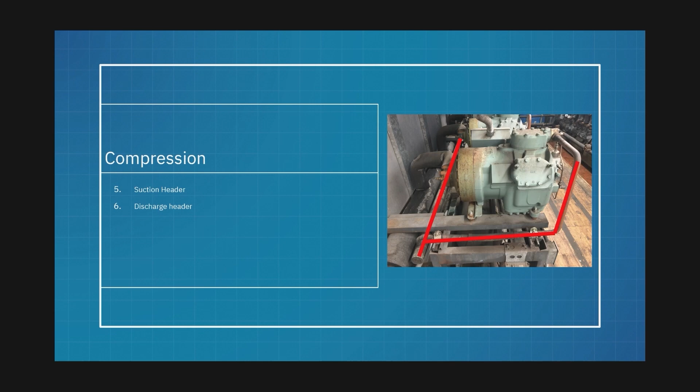So we talked about our oil control on our compressor, and it's getting oil, right? Well, this is the entire oil system. If we look at the discharge, that's the red pipe. The first thing it's going to hit is our oil separator. So we're going to run through the oil system, how that's going to work, how we're going to get that oil into that oil control, and then several things that can go wrong, because that's for techs. If it worked, we don't care. It's when it doesn't work that we want to talk about.

So that's a picture of my oil separator, right? That's one version of our oil separator. That Temprite, yeah, we know that one. That one, if you notice, is kind of sitting out of the way. That's a retrofit, not the original oil separator. Didn't fit in the space where the old one did.

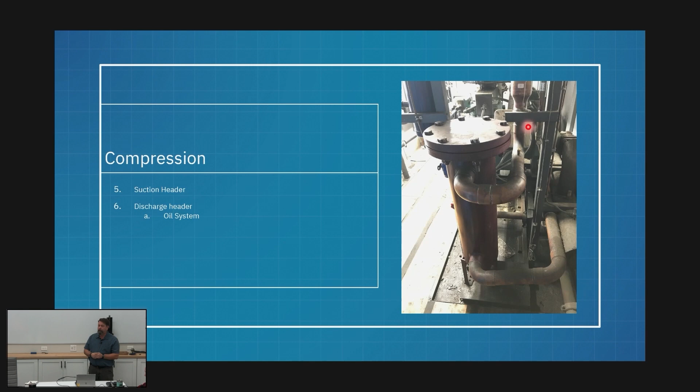This is something Kalos is doing, right? We do these on projects. Here's the oil reservoir, that's where the oil goes. It comes out of my separator, and there's my OCV.

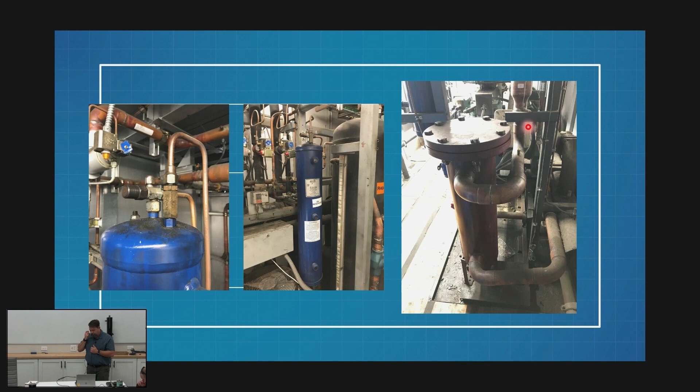So hopefully by now, everyone in here has heard something about this. This isn't the first time we've had some type of oil class. Not going to spend a ton of time on it, but I do want to go through it again to make sure that you guys are clear on it. And if you've got questions about any of these pieces and parts, let us know. So the first thing, let's talk about that oil separator.

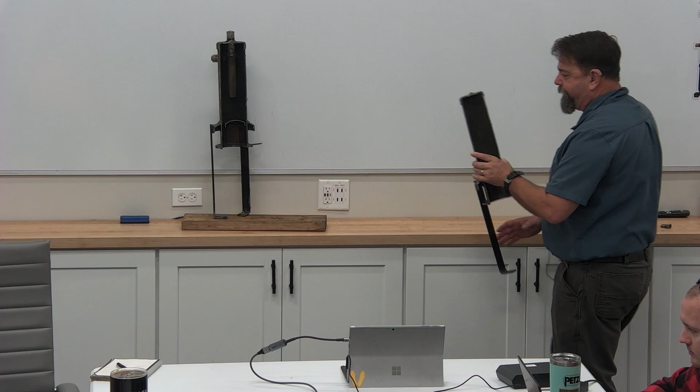Yeah, let's go through that real quick. So we cut this one apart. We've had it in here a few times. I actually took it apart this morning unintentionally. I'm just going to pass that around.

So the oil separator - my hot gas is going to come into this guy, and it's going to take that oil, a huge portion of the oil that's coming out of my compressor, and pull it out of the refrigerant. Now, I said a huge portion - how much? Well, it depends on the type of oil separator, it depends on the system, but not 100% ever.

All right, we're never going to separate 100% of our oil. So we're going to circulate some of our oil through the entire refrigeration cycle, just like a self-contained or a single condenser, single evaporator type system. Your air conditioner has got oil in it, and it's going all the way through. Well, we're going to still do that. We've got to do that because we've got valves in our system - TXVs, solenoids, EPRs. We have all kinds of metal valves, metal on metal.

So we want to be sure that we lubricate that. So we actually have two oil systems - that's the passive oil system I'm talking about, the one where I'm not separating from this separator and I'm sending it out to the store. Now, why does that matter? Well, there's a couple reasons.

For my startup guys, this is piping, right? It's a passive system once it's installed. But if it's not installed properly, it's not going to return my oil properly. So my startup guys have got to be looking at this to make sure the installers put it in correct. There's a lot to that, and this isn't really a class about that, but I am talking about traps - inverted traps at the top. I'm talking about my risers being one size smaller, or whatever the engineering is calling for.

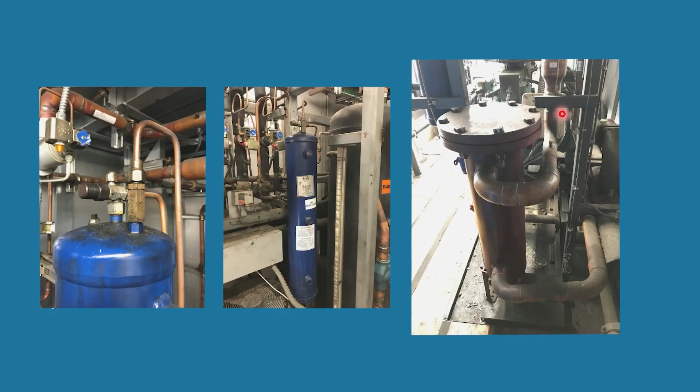All right, how many balls should we be floating in an oil reservoir? Anybody know? One or two. All right, so the idea is one, okay? But let's talk about it in practice, the way this plays out. So that one I got a picture up there has three balls. A lot of them only have two. They're a third smaller, okay, hold a couple gallons, that's it.

All right, how much oil do I need for that separator to work properly? About a teaspoon, right? I just got to cover the hole in the bottom so refrigerant doesn't blow out into my compressors. The bottom coming out of that is going to my oil float, my oil control, mounted on my compressor. So I got to keep that hot gas from pushing out to my oil control. So I got to have a full line of oil. That's literally all, I don't need any more than that.

So what's the story with all these balls? Why do I need one? Why do I need one ball floating? Because I don't know if I have zero teaspoons of oil in there and I am blowing hot gas, or if I've got enough oil in there that I'm not. I have no way to know that between zero and under the first ball. I have no way to know. So the first ball is for me to know I have enough oil. That's why I have one ball. That's why we say we want one ball.

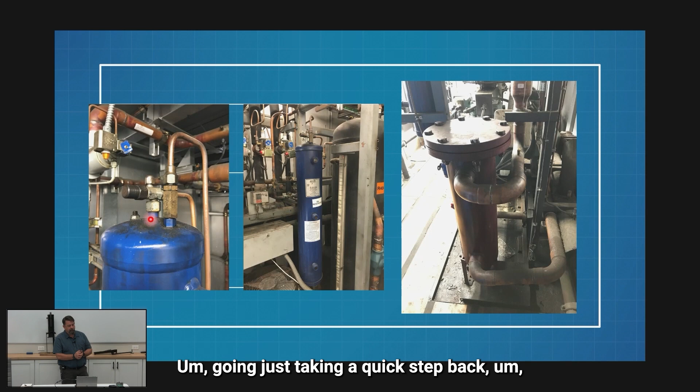You don't have anywhere to push that oil, so you lose your differential. Yeah, okay, all that's gone. Your ball opens and nothing happens, very little, right? Yeah. So now I'm gonna start filling this guy up.

So now I've got two oil separators, or reservoirs. My oil separator, and my ball sits here. That can hold a gallon, huh? Maybe two? Gallon and a half? Yeah, till I get all the way up here? Well, one of the things that's gonna happen is, as I start losing the amount of space in here, because my oil's filling up, this guy's velocity is gonna change.

It's not gonna be as good, right? So I've got less surface area to separate, so he's actually gonna stop separating. That's what we're gonna actually see happen, okay? So I'm gonna start filling up with oil until I get to a magic spot where I just don't have enough surface area for that to happen. I just stop separating.

Right, Michael? Oh, so that's how not letting oil out causes an oil separator to stop separating. Okay, right, now-

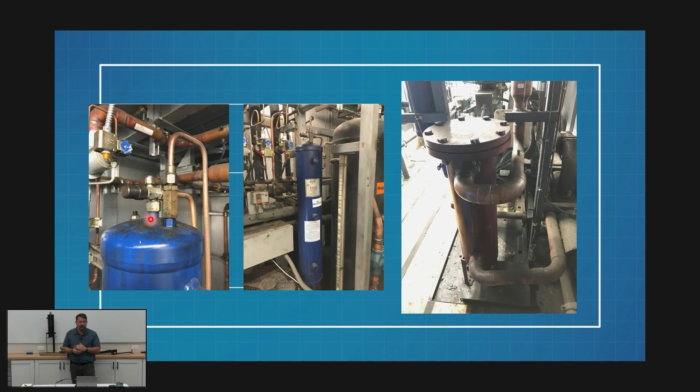That's why am I pulling this out? Yep, I suspect it's stopped up, right? Or something's not feeding and I'm checking it. I'm gonna have some oil. That's my low pressure oil system. Anybody got any questions about it before we move on?

I've told myself this after somewhat proving it to myself. The only difference between low pressure and quote unquote high pressure oil systems, we're gonna cover high pressure oil systems next, is quite literally where it drops the pressure. At the point the pressure drops, your oil pressure going to the compressor should be the same, if you have two identical racks and the only difference is one has high pressure, one has low pressure oil system. You should have nearly the same oil pressure going to your flow control. So let's talk about that for a minute while we're still on the low pressure oil system.

My OCV 20 guarantees oil's only moving by pressure, so I must have a pressure differential. My reservoir is at 20 pounds over suction. My oil control is bolted to my compressor, it is at suction. The most I'll ever have is 20 pounds, and I'm probably gonna have less than that.

Now if my rack is nice and stable, my suction is not going all over the place, why wouldn't I be at 20 all the time? Well, I'm opening the float and feeding oil, and that's gonna cause the pressure to go down. Guess what, that's about 17 pounds roughly, is an average pressure that we would expect to find on a low pressure oil system with a textbook perfect suction, which you're never gonna find. But that would be about 17 PSI. That's why they choose the 20.

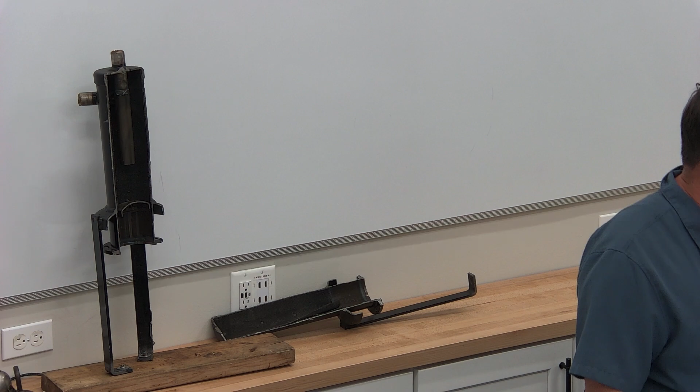Anytime I see that, I've got this going on, regardless of the model, make, manufacturer. Henry does it different than this - they've got a screw inside here, but they're still causing your oil to spin, centrifugal force. Call it helical because it's a screw. So when I walk up, that's what I want to see. If I see a giant steel plate with a gazillion bolts in the top, that's coalescing - got a filter in there, got a cartridge with the pressure.

No float. Yep, I don't have a float. All right, this is an important difference in construction.

This little tiny hole is, quote, the Achilles heel of this system. If I get a bunch of crap in here, and I will, right? This is where all the crap is gonna go. If I get a little bit of that crap in that little hole, I can either cause that pin to stay open or cause it to be plugged and never feed. That's our most common problem with the low pressure oil system, right here, this hole.

Or the ball gets a crack in it and then it fills up with oil and can't float. And that can happen, sure. I got no float on this guy, I have eliminated all those problems. There isn't one. Cool. Oh yeah, valve though.

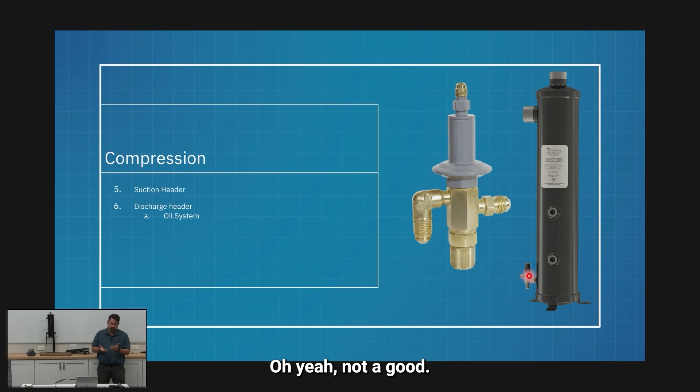Oh yeah, no, yeah. Now here's the other thing, diagnosing this is difficult, because if I take pressure off of this system to check it, and the pressure's what's holding it there, you're gonna buy yourself some time and that's gonna do it. I'm gonna put it all back together, everything works, yay!

I'll see you in 3 days. Who knows? So that guy picks back up and sits back. All right, so we're not gonna diagnose that in one shot. I'm not gonna be the first guy to show up on this job ever and diagnose that I got a reed sucking into this thing. We're gonna have to deduce that, because it happened, it didn't feed, we took pressure off, we stopped our flow, it cleared and then started flowing again. Yeah, it's just bouncing around the bottom.

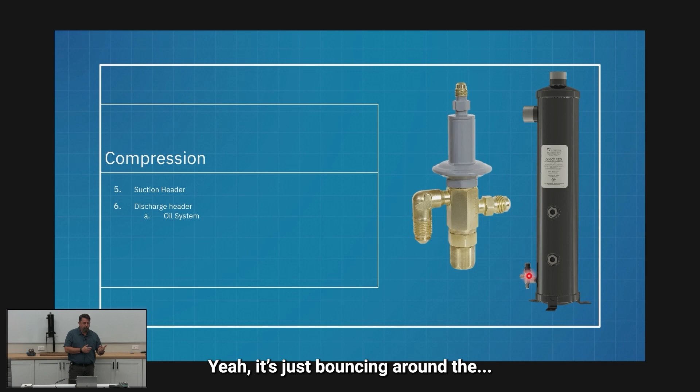Right, now to confirm it, that's my thesis, I'm stopped up. Then to confirm that, I gotta see that happen a few times, because I'm changing a separator. I mean, it's not a 2 AM, I'll open Johnstone and grab one kind of thing. And that, you're taking the rack down for multiple hours.

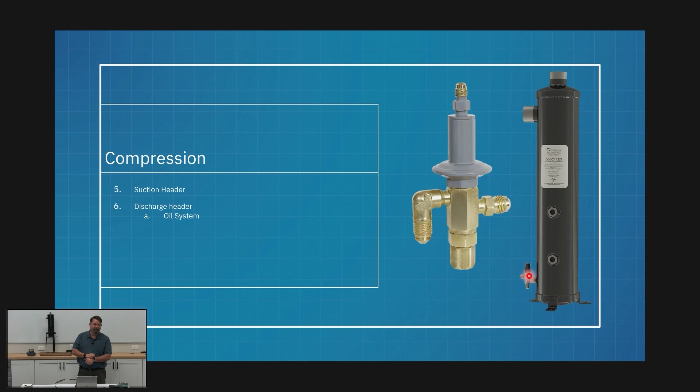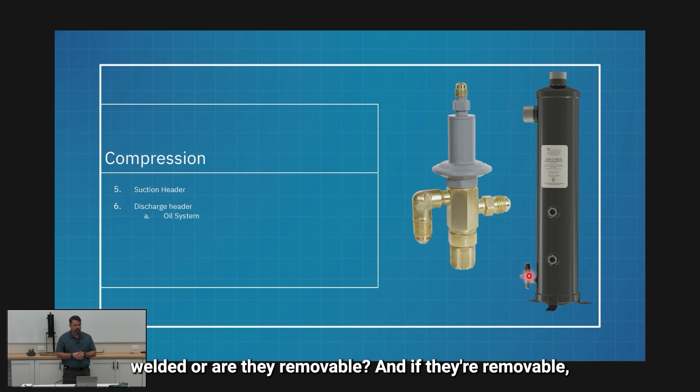Right, just a quick thing, are those sight glasses welded or are they removable? And if they're removable, would you be able to stick a magnet down in there, fish a magnet down in that? So unfortunately, most of my reeds are not magnetic, they're aluminum or stainless. So it fits back in there, I think. Some of those are, some of them are not, depends on the manufacturer.

All these pictures that I have are Westermeyer's, by the way. I'm not in love with Westermeyer's, they just provide really good pictures.

I can make some recommendations if you're thinking about who to go back with, other than Westermeyer.

Nonetheless, we've got another problem. We've worked through this. We've got our reservoir with all of our oil sitting with no ball, so no restriction in flow, at discharge pressure. We've already discussed our oil controls cannot take discharge pressure. So I've got to reduce that pressure somehow. I must reduce that. I've got to do the job of the OCV. I've got to get my oil pressure back down into the 20 PSI and lower range.

So the way I'm gonna do that is this Y1236 valve. You can see that in my drawing here. You're gonna see my oil come out, it's gonna go through a filter, and then it's gonna go through this Y1236 valve. We can think of this as an oil regulator valve. It's an adjustable valve where we can say, I want X PSI over my suction, and it will give me that. Here's how it works.

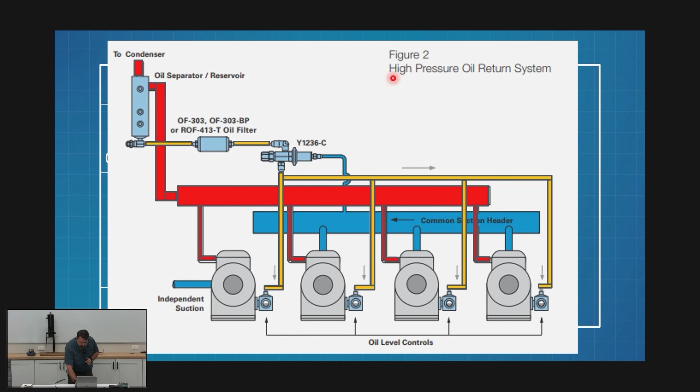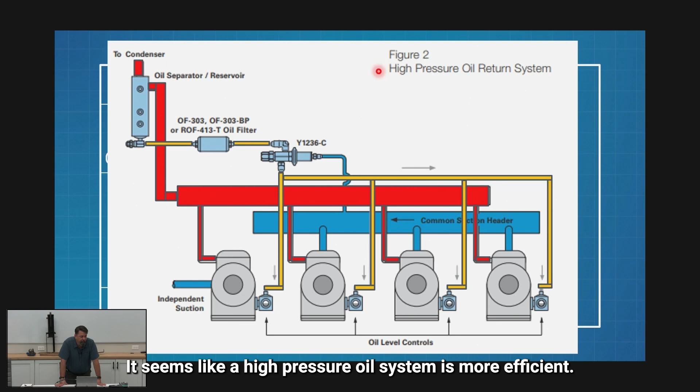Pretty much, you've done that. If you are married to that rack now, until... all right, so does that eliminate the mysteries on the high pressure oil system?

So the next thing after we come out of our oil separator - remember we're tracing out a refrigeration cycle - is, on a parallel rack system, a check valve. Now this is one of those things that's kind of out of sight, out of mind. We hardly ever have any issues with it, but let me talk about what it is, why it's there, and when we're gonna have problems.

The purpose of the check valve is to allow refrigerant to flow in the direction my arrow is pointing, up towards my condenser. Generally our condenser is at the same height as my rack or higher - we prefer them to be higher. So the refrigerant flows through my condenser and condenses into a liquid, which is heavy weight.

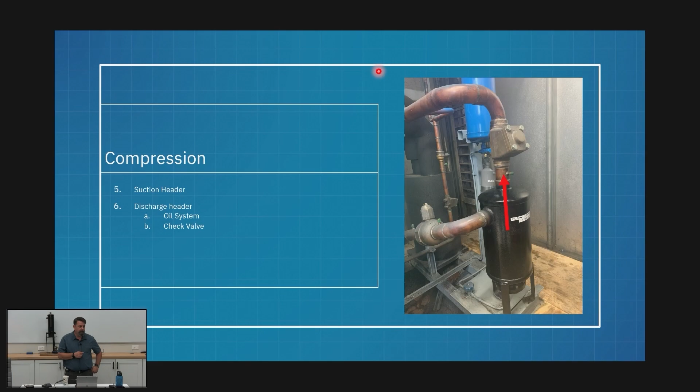The next thing I want to talk about in the discharge line, after I've left my check valve if I have one - not every rack has one - is heat reclaim. Heat reclaim can be a number of different things. One of the most common is water: we take water, run refrigerant waste heat through it before we go to our condenser, and make hot water.

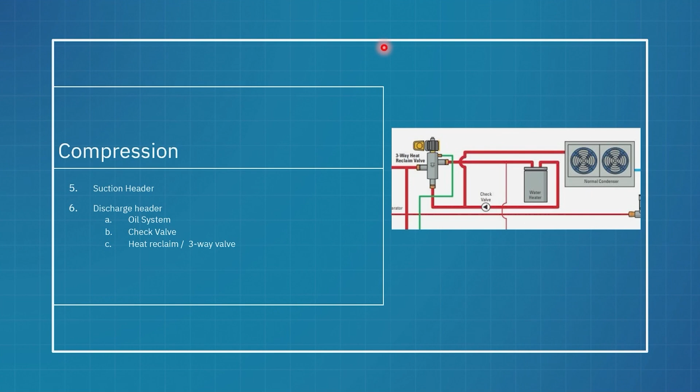Supply the store. Another very common use is reactivation or reheat on a dehumidification system. I'm using my compressors to cool that air, shrinking the envelope so I've got less water in it, but then my air is too cold and I need to heat it back up. Instead of running electric heat, I've got waste heat I'm getting ready to reject with fan motors - perfect place to use it. It can be a number of things. Now the way we do that is through a three-way valve. Three-way valves have really two major differences in their configuration, and it's important we understand which is which - they're not interchangeable.

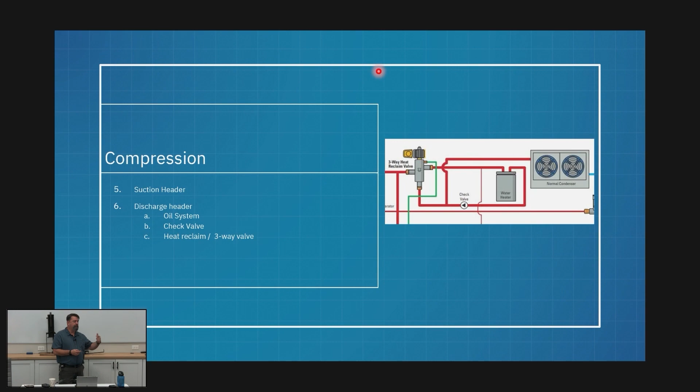So we'll talk about that for just a second. In this case, that's what it's gonna look like. That's the hot gas pipe coming straight off my separator, coming right out of my check valve, and it's feeding right there. In this example, these pipes are coming over here to my heat reclaim.

So my computer, my rack controller, is going to make the determination on what's going on here, if I can energize this or not. What would cause me to not? Low refrigerant level, right? If my rack knows it's running out of refrigerant, it's not going to waste some on heat reclaim. So that's just one of those things to keep in your mind.

Why is my heat reclaim not working? Could be low refrigerant. That's one of the requirements for using heat reclaim, is my rack's got to say it's okay. The other thing it's monitoring, of course, is either hot gas or discharge pressure. If either of those falls too far, I don't want to reject more heat. It's going to be a bigger problem.

Now, the other thing we may be using to make this work is a mechanical temperature sensor. Seen that too, strapped right to the water pipe going to the store. They use recirculated water. When that water gets cold, that thermostat closes its contact. Well, how can I have a computer and a mechanical device? They're just wired in series. They all have to be closed to energize the solenoid on the three-way valve.

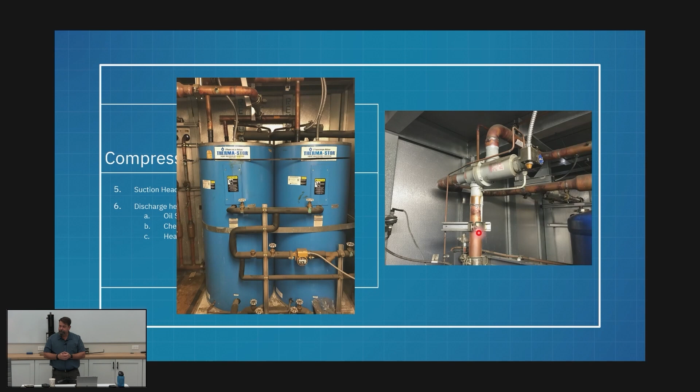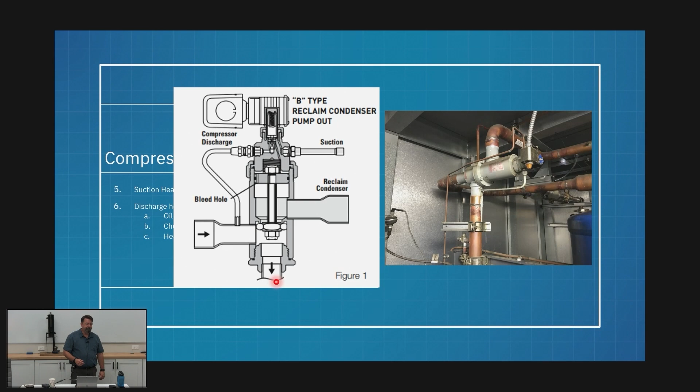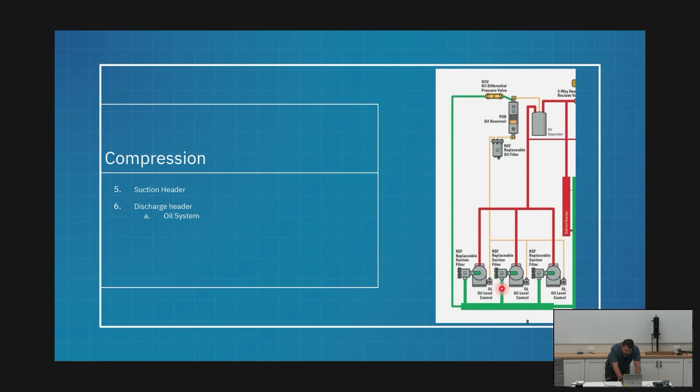Halfway through this week's class. All right, anything we want to talk about? Now, this is compression and the first half of my condenser. Anything you guys want to talk about that we've already covered before we move on? This is actually a kind of nice place to break this up, on our refrigeration cycle. Remember, we've covered our compressor, a little bit of the suction leading into the compressor, and a little bit of the discharge pipe coming out of the compressor. That's it, right? So we got a lot farther to go.